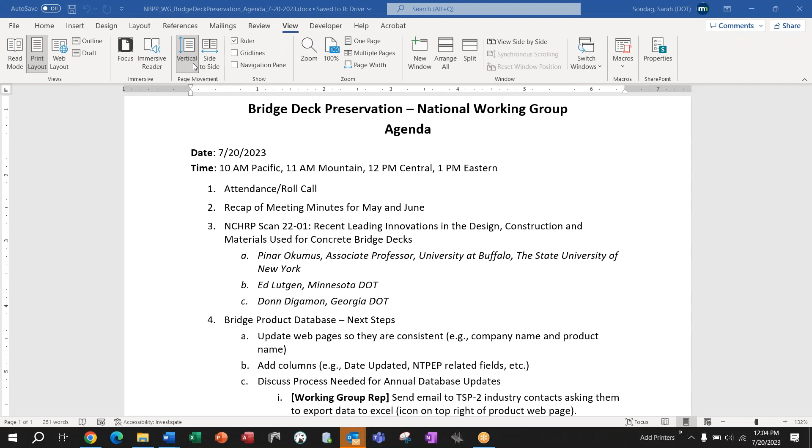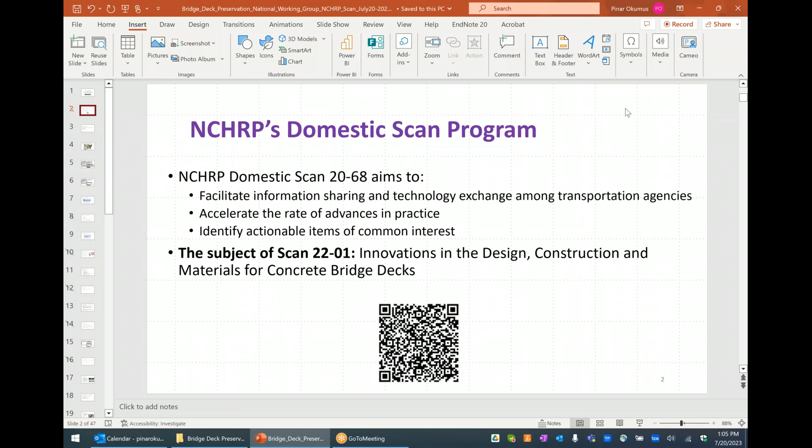Does it become public then? It doesn't have to be. I was just thinking that I know there's a few people that aren't able to get on the call today that might be interested in hearing it, so if that's okay with you. Yeah, that's totally okay, even if it's public, it's okay with me. I just don't know how NCHRP feels, and we won't share it unless we get the okay from you.

Okay, that's great. I'm new to GoToMeeting, so just bear with me. How do I hide this? Okay excellent. All right, so can everybody see my screen now?

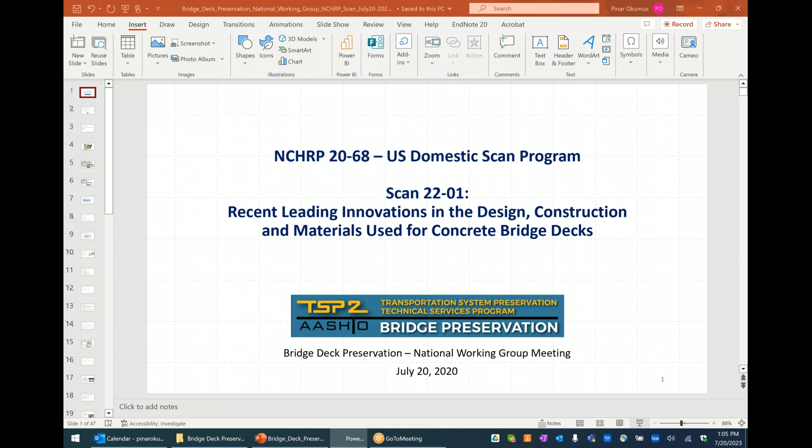Yes, we can. Excellent. All right, so like Sarah said, I'm Pinar Okumus from University at Buffalo, and Ed and Donn were supposed to join us, and we were all part of this domestic NCHRP domestic scan on innovations for concrete bridge decks. So I'm going to try to summarize what we discussed over a whole week-long workshop in about half hour.

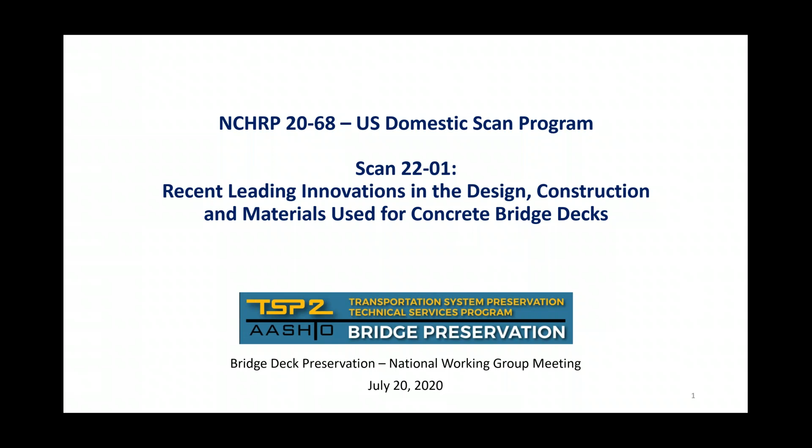Our motivation for the scan essentially was to talk about three different things: materials, construction practices, or design practices to improve deck durability. We did actually talk about other things like environmental sustainability or accelerated construction for decks, but it looked like for most participants of the scan, durability was the number one motivation to make decks better.

In case you're not familiar with the NCHRP scans, essentially we bring together transportation agencies so that there is information exchange between the agencies, so it's all different practices of different transportation agencies.

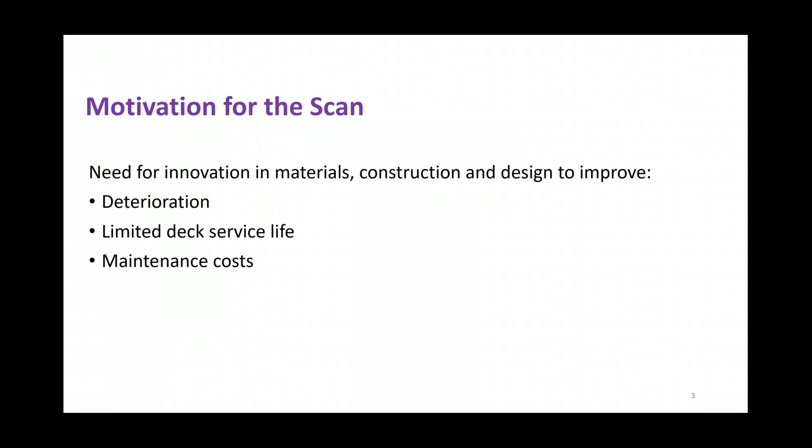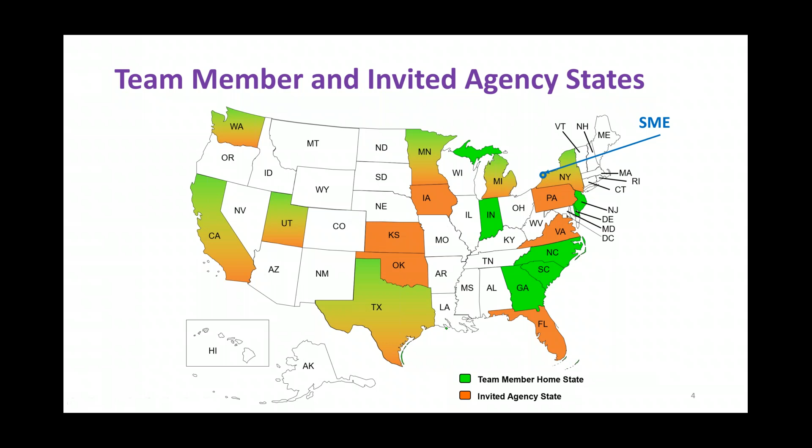The report should be available in a couple of months. I won't have time to go through every single one of them, but there's a ton more information in the upcoming reports. But I'll try to give you an overview of what we discussed and what we found out.

So I'll start with this first group: concrete mixes, placement, and protection. And that part really, so our scan was focused on innovation, but this particular part is really more going to be about best practices and modern concrete mixes. So not too much innovation there in terms of materials, but what worked the best for the agencies that participated in the scan.

Okay, so the first thing we really discussed was what makes a concrete mix crack less. And one thing that really came out was the paste content of the mix. So it looks like for these modern mixes that have less cracks, the paste content is limited. So if you limit the paste content, which would be water and cement content, it does seem to result in fewer cracks. And of course you also get a moderate strength, but the consensus was that we don't really need a terribly high amount of strength for concrete bridge decks anyways.

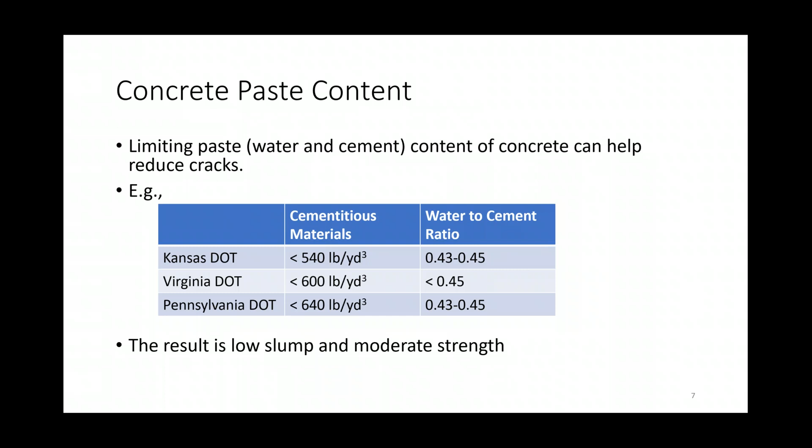The second thing to say about concrete mix is that limiting concrete shrinkage strains seems to have a big impact. That's a common performance requirement we saw when people had these high performance mixes. Some DOTs in the scan achieve it with shrinkage reducing admixtures. California is a big fan of this, and they reported really benefiting from shrinkage reducing admixtures without increasing the costs all that much.

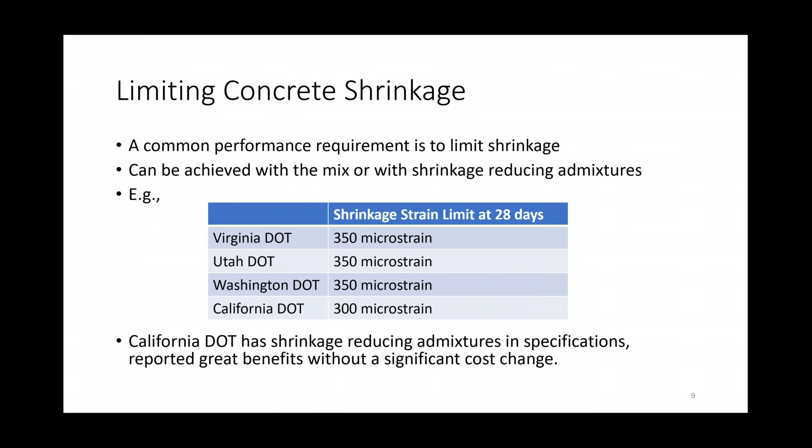In the report, there's going to be a case study from California DOT that details how they came out with that mix. We have 4 examples from participating states on their shrinkage strain limits, right around 300 to 350 microstrain, and how they achieve that is kind of up to them. For example, Virginia DOT uses shrinkage reducing admixtures, but it's optional. If they can achieve the shrinkage strain without the admixtures, they're okay with that.

We also talked about placement and finishing. Again, this is really not innovation, but most DOTs agreed that you get the best quality concrete when you minimize finishing, so that you can start external curing or wet curing right away.

We talked about bringing work bridges to site so that workers can start curing right away without having to wait for the deck to harden, avoiding that timing delay for the same reason - so you could start right away with external curing. Some DOTs mentioned monetary penalties per hour of delay in external curing to encourage contractors to start curing right away. That was a big thing, essentially, getting started with external curing right away.

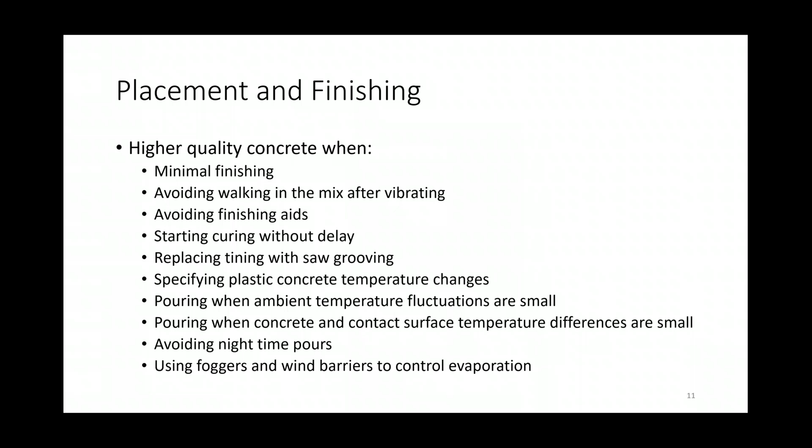Use misting even before that, if you can. There was also discussion about specifying temperature changes for plastic concrete, trying to pour when ambient temperature fluctuations were small, or at least when the concrete and the contact surface - the girder - temperatures were close. If the concrete and girder temperatures were very different at the time of the pour, it seemed to cause more trouble, and avoiding nighttime pours for that same reason. So controlling temperature as much as you can seems to result in better quality concrete.

We did talk about external curing, like I said - wet curing like we all do - the key is to start right away. But there's also this new innovative way of curing concrete called internal curing.

Essentially what it is: you replace a fraction of your aggregates with pre-wetted lightweight aggregates. That water in the aggregate is released over time to help hydration. So instead of just hydrating the surface of the concrete, you're essentially hydrating from inside out - internally.

This was very interesting, and we spent a lot of time on this during the workshop. For some states, this is pretty much standard practice - New York and Virginia were two of those states, and they do this for all their concrete decks and have seen great results. But other states have mixed results with this. We came to the conclusion that the states with good results must have good quality lightweight aggregates, and they're confident with the moisture content of the aggregates.

Suppliers know how to store them. Versus if you have mixed results, you probably either don't have lightweight aggregates at all, or you're not sure about the quality of it, or the contractors are inexperienced. Also, this is a method that requires a good amount of owner involvement to set it up right. So if there's insufficient owner oversight to get this method working, that seemed to be when there were mixed results.

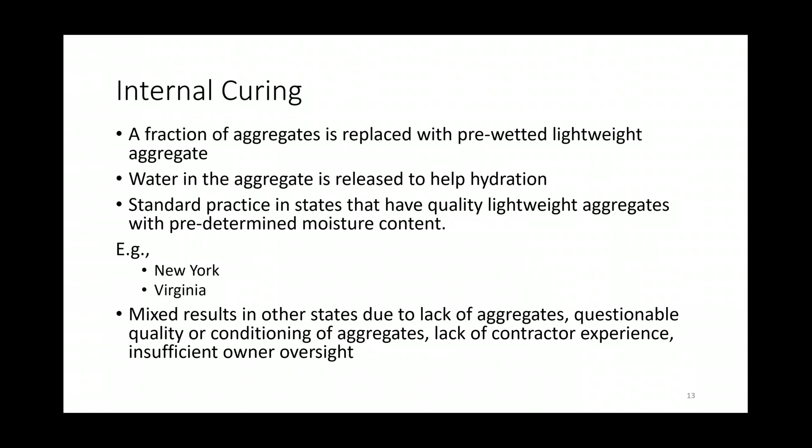I would say New York and Virginia are the two states that really have all internally cured concrete, and they do get great results. So that's what we talked about when it comes to concrete mixes. The next thing we talked about was adding fibers to concrete, so that's what I'll cover next.

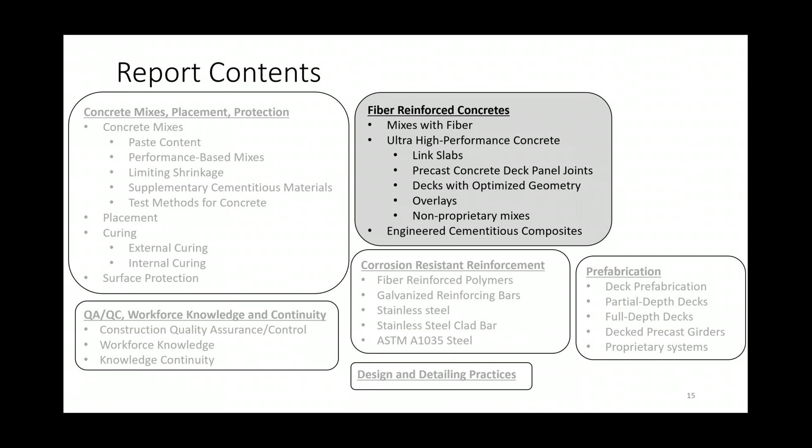All right, so mixes with fiber. Some agencies do this to have an additional measure, kind of insurance essentially, to protect against any issues with quality of the material they get, concrete mixed material, or the construction quality. Because construction quality is big to make concrete crack less. For example, maybe you have delays in external curing, or workers end up walking in concrete after finishing, after vibrating. So to protect against these unexpected or undesired events, it may be good to add fibers into the concrete.

California presented on this, and it is standard practice for them to have fibers in their mixes. Minnesota also has fibers in their deck mixes. But one important thing that got emphasized was that if you just add fiber in your mix and think that it's going to work, that's probably too naive of an approach. The type of fiber - there's various different types, suppliers, sizes, orientation, distribution - all these things impact results greatly.

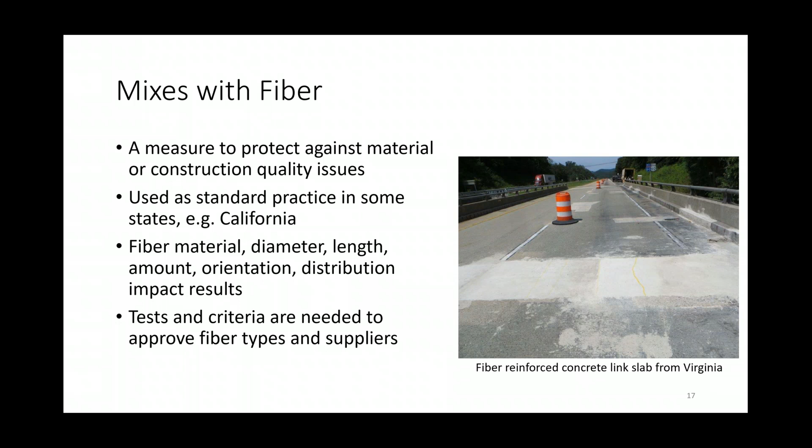Okay, so the next thing was ultra high performance concrete, UHPC. You've probably all heard about it because it's such a popular topic right now. It's essentially a type of fiber reinforced concrete. Usually the fibers are high strength steel fibers, and UHPC is essentially a fiber reinforced concrete with a specific performance objective - it has very high compressive strength, more than 22 KSI is possible, which is not so critical for decks to achieve, and it has low permeability, so very high packing density, low permeability, which makes it very durable and attractive for deck applications.

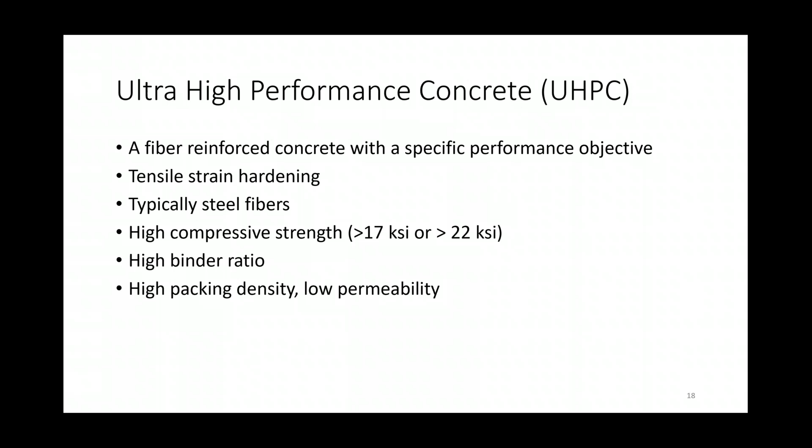So we discussed multiple different applications of UHPC. I'll give you some examples. One of them was link slabs. This is essentially that piece of the deck that goes over the supports or connects two girders, or between two girders. Link slabs are actually used with conventional concrete as well, but they tend to be much, much longer.

New York has started replacing some bridges, bridge decks with expansion joints, with these link slabs, and they reported that they've had great performance with these. When they switch to UHPC, they now can have a link slab that's much shorter, just a couple of feet, as you can see on the right-hand side. And the thickness is also smaller too. So that completely eliminates the expansion joints, and that's how they get durability. It's essentially acting like a hinge on top - that's why they debond between that UHPC layer and the girders. They've done several bridges with this, replaced them - this is mostly for replacement projects for them, but they still have many to come. So they're going to continue to build these.

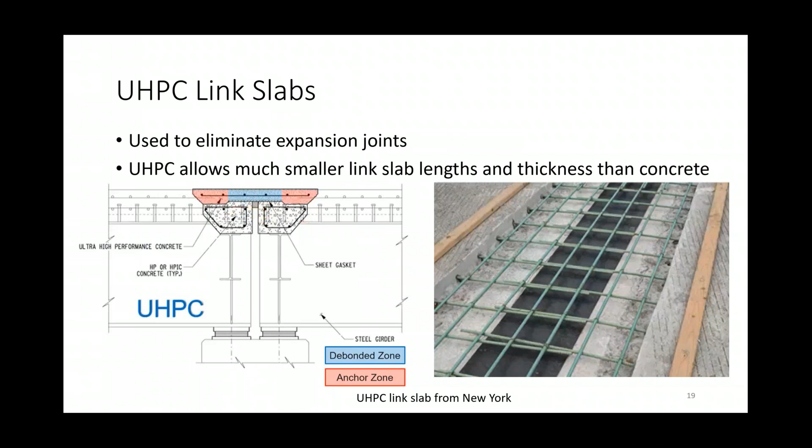Okay, the second example with UHPC applications is deck panel joints. These would be precast concrete deck panels. UHPC, as you know, is much more expensive than conventional concrete, so most of the applications you see would be small volume applications. This is an example of that - precast concrete panels, either between the two panels or between the panel and the girder, you can use UHPC. We heard during the workshop from Utah and New York, and they both reported that when they did use UHPC joints, they actually got pretty much equivalent performance to post-tensioning these deck-to-deck joints. So if post-tensioning is not a desirable construction method, UHPC seems to be a little bit easier.

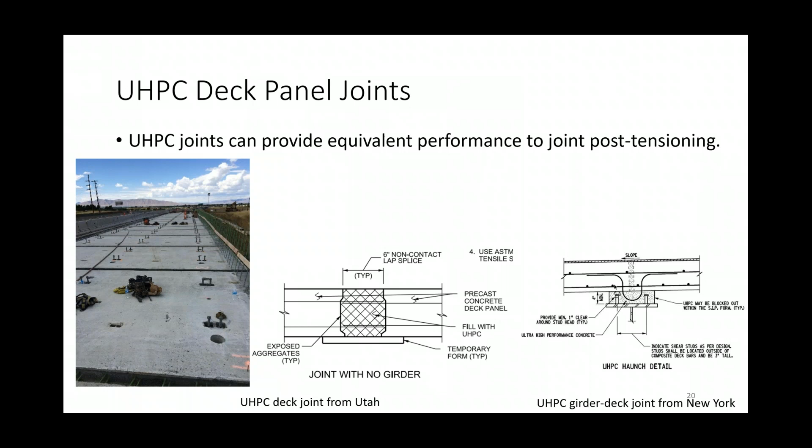All right, so here are some really key points in making UHPC work, and this is not just for these two applications, but for any application - I didn't cover it all with UHPC. One very important thing is to really seal the forms against leakage, because UHPC is a lot more flowable than normal concrete. That's why you see on the right hand side that there's actually a top cover as well for that form. So you do have to seal them, and it's a material that tends to settle a little bit.

So when it hardens, you actually essentially fill the joints a little bit more than you need to, accounting for that settlement. That's why there's that bucket here - it's essentially maintaining hydraulic pressure over that joint. And if you do have a little bit extra, that can get grinded off later.

The other key thing is that if you're pouring UHPC at point A and expect it to go to point B, and those two points are very far from each other, UHPC is just going to flow a very far distance. What can happen, what people reported happening, is the fibers essentially all orienting in the direction of the flow, which is very undesirable. So we do want a random distribution of fibers. Keeping those flow lengths short is recommended.

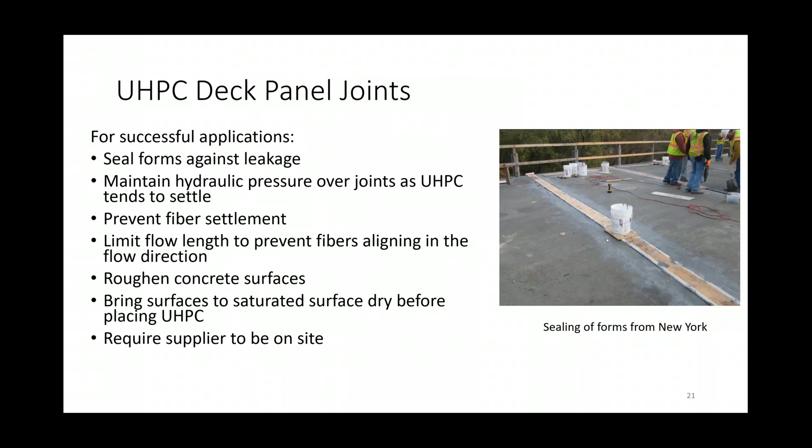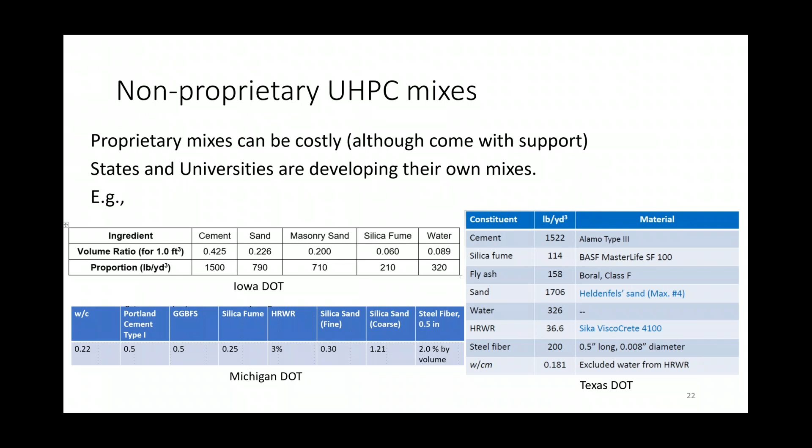All right, finally on this topic - UHPC, the proprietary mixes can be very costly, although there are now multiple vendors and suppliers of UHPC, and the cost is expected to go down. Many states and universities are now developing their own non-proprietary mixes. I give three examples here from Iowa, Michigan, and Texas, because they participated in the workshop, in the scan, but really there's many others across the country. So everyone is now coming out with their fiber reinforced, low permeability UHPC mixes.

All right, so next I'll move on to corrosion resistant reinforcement.

I don't know if it's better to take questions at the end, probably for time reasons, but if there's any burning questions, please feel free to unmute. Yeah, either way will work. We have plenty of time, so if you need more than 30 minutes, please, you're fine. Okay, that's great, thank you. I thought I saw that in the chat. Great, okay, would anyone like to? And I saw Ed sign in, and if Ed, you want to add anything at any point, feel free to.

Okay, all right, so we did talk quite a bit about corrosion resistant reinforcement as well. Although one theme that came out of the workshop was that if you can control cracking with the concrete mix itself - if you can come up with a modern mix, a low shrinkage, low paste content, high cost construction quality mix - then that's really the best option, so that should be prioritized. Corrosion resistant reinforcement really kind of should come next, maybe it comes after, it's used for bridges that are just very remote and very hard to maintain, or hard to access.

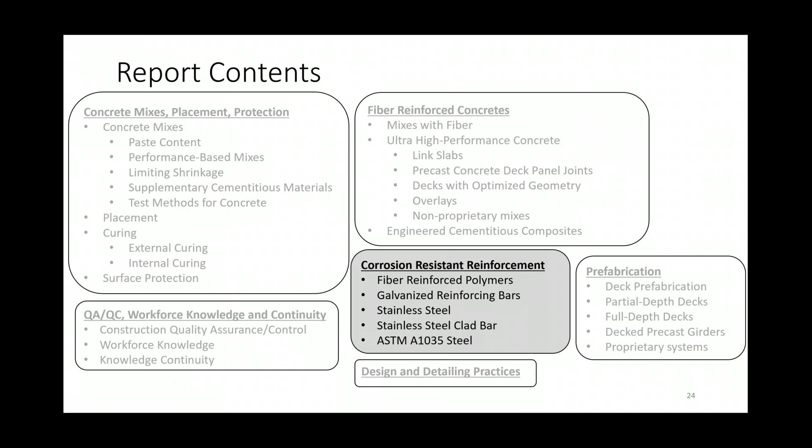Okay, so I'll start with fiber reinforced polymer, or fiber reinforced plastic, FRP rebar. There's different kinds of FRP rebar - glass FRP, carbon, aramid - but glass tends to be the most common, is cheaper. So most of our discussion focused on glass FRP rebar.

For this one, we heard from Florida DOT that has used FRP rebar actually since the 80s. They have a great website dedicated to their FRP research. They have essentially developed concrete applications with FRP rebar, although most of their applications are for substructure units, because in Florida, the corrosion starts from the salt water, not from de-icing salt. So you see a lot of piles and substructure units, essentially.

The differences between FRP rebar and metallic reinforcement is that it doesn't corrode, it's not metallic, so that's great. It's very lightweight, so it's very easy for construction workers to pick them up and move. So it does facilitate construction, actually.

But there was some discussion about how the FRP grid can actually float during the concrete pour if you don't secure it well in its place. So you can technically get smaller covers, like smaller top covers, deck covers, reinforcement covers, because it doesn't corrode, right? We don't need that large cover. But just because some DOTs were worried about the floating issue, they still went with a larger cover.

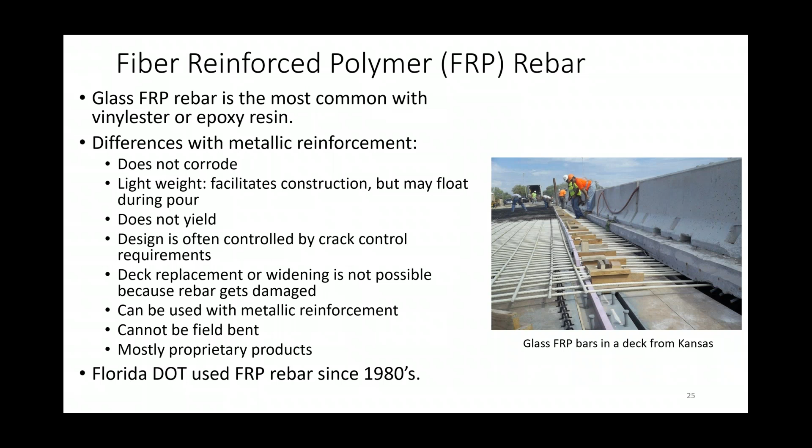Okay, then we talked about galvanized rebar. We're all familiar with it. I think the hot dip version of it, or batch galvanizing. So ASTM A767 bars have been around for a long time.

A newer product is continuous galvanizing. So it's essentially, there's a difference in how they galvanize it, and there's one supplier of that in the US, and they do claim that it makes the operation a little bit more efficient. So you can essentially, the bars get bent and galvanized at the same facility. So if you're close to this facility, it may be a good option to go for.

They do not have that issue that epoxy coated rebar has with bonding to concrete. So it's essentially similar bond to concrete as you would have with your black bars.

And on this topic, we heard from University of Kansas again. Dr. Darwin came, and their results show that both hot dip and continuous galvanizing essentially had similar performance. They had some lab testing and field observations to show that. And they did run some service life analyses.

So they reported that the rebar has a slightly higher initial cost, but you can get about half the service life cost as compared to uncoated rebar.

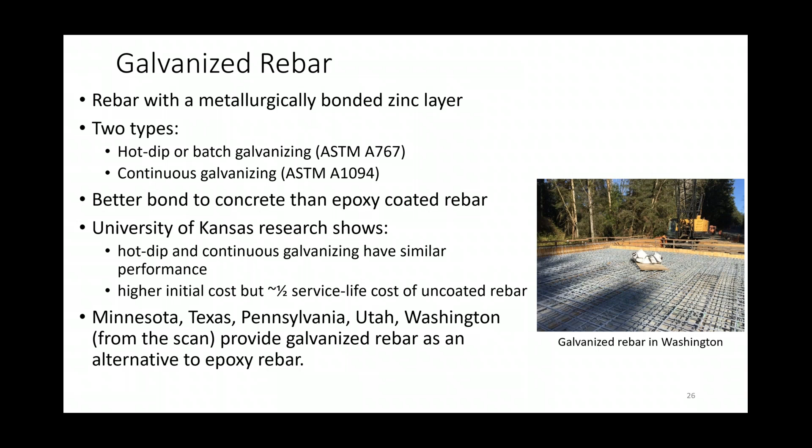Okay, we did talk about stainless steel rebar. So stainless steel rebar, when it came to that, the conclusion was that it's an alloy, right? So not all stainless steel is the same. So really the performance will depend on the type of the stainless steel rebar.

One interesting thing that we learned from Virginia DOT is on the right-hand side. They do have these X-ray fluorescence handheld devices, and it can actually tell you the composition of that alloy. So they were using it to verify essentially what you specified was the same as what they received from the manufacturer. So that, I think, is the quick way to check the alloy, and of course, specifying the type of the stainless steel on the specifications is important.

We heard from Virginia and Michigan about the cost of stainless steel. Virginia reported a 5% additional total cost if they use stainless steel in the deck, and their justification is that the cost may be smaller than a future overlay, which makes sense. Michigan DOT reported about $17 a square foot of additional cost, and that's, again, 2011.

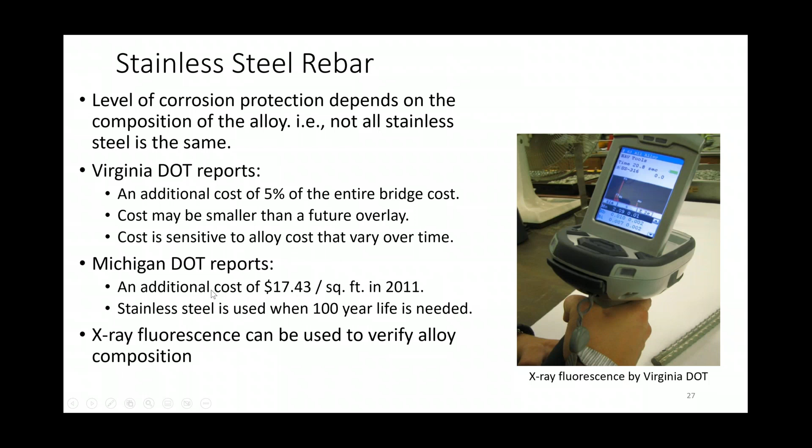ASTM A1035 bars are another alternative. You may have heard these with their brand names, MMFX or ChromX. These are chromium alloy steels, and there are 3 different types: CS, CM, and CL. CS provides the highest corrosion resistance, and of course, it has the highest price.

They come with either 100 KSI or 120 KSI yield strengths, but most agencies that participated in the scan reported that they choose not to rely on that high strength. They just use it as a one-to-one replacement of good old grade 60 steel, or cap the yield strength in the design to be conservative. There isn't all that much data available for the long-term performance of these bars.

Most states use the CS type because that's supposed to provide the most corrosion resistance. Minnesota reported some quality control issues with the CM type, so the manufacturer is aware and working on that.

The cost is a little bit higher. I put the Michigan DOT numbers here, so $2 to $3 a pound versus $1.5 to $2 a pound for epoxy coated bars.

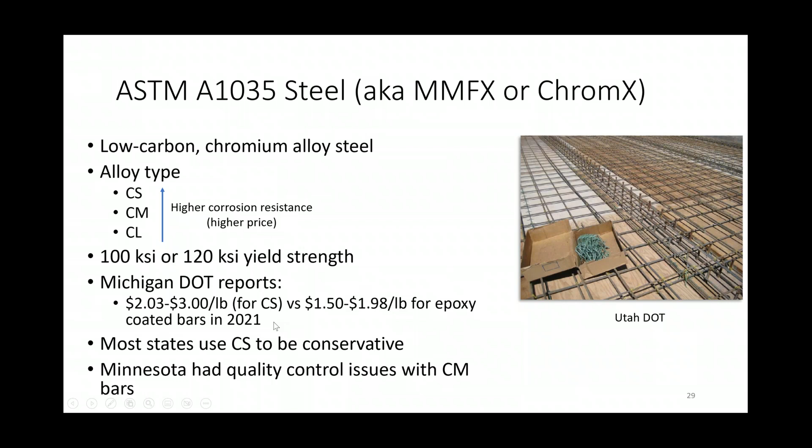The next step is prefabrication of decks, and that's for both accelerated construction and also durability, because you're getting prefabricated units that are steam cured, built in a higher quality environment. I won't go into every one of these categories, but like I said, the report has a lot more.

I think I picked 2 here. One is the partial depth precast deck panels. These are essentially like stay-in-place forms that may be pre-tensioned, about half the deck thickness, and they provide a safe walking surface and formwork, essentially.

We heard quite a bit from Texas DOT, because apparently more than 90% of their bridge decks are built this way. This is essentially standard practice to use stay-in-place or partial depth precast deck panels for their deck construction.

We do know from the other states who participated in the scan that not everybody has a great experience with this. Some other states, for example, have reflective cracking when they use these panels. But Texas told us about their keys to success. Two important things we noted: one, they have these bedding strips.

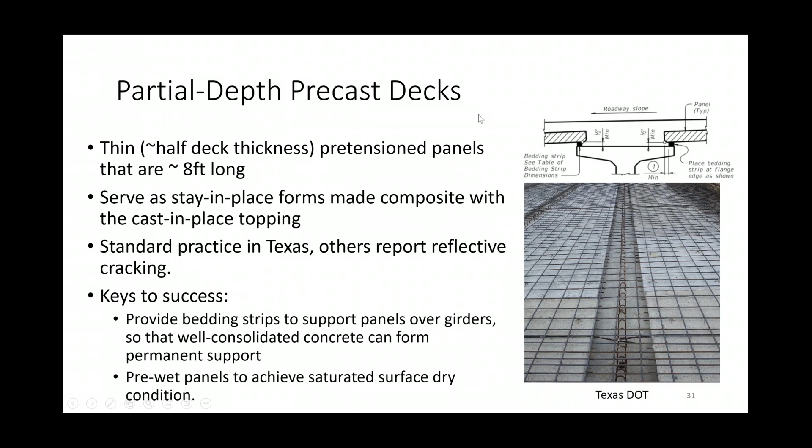We also talked about full depth precast deck panels. We touched on it a little when I talked about UHPC, but they're great for rapid construction, or if you're far from an area with concrete suppliers.

We heard from Utah DOT and New York DOT, who use these full depth deck panels and are happy with them. We also heard from California DOT, where the bridge was fine but it was quite costly when they tried it, because they used it on a bridge with complex geometry. It had a curve, so it's likely a costly alternative if you have complex geometry, but if you don't, then it seems to be a pretty good alternative.

For this, again, joint details and materials are critical. Utah told us that either they post-tension the decks together or they use UHPC, and those are equivalent to each other, so either of those joints perform well. In the past, they had much wider joints with normal concrete, and those had cracking between the panels, so the joints didn't perform very well.

Because UHPC bonds so much better to reinforcing bars, your development lengths are much shorter, so you can go with much smaller joint sizes with UHPC, as you can see on the left-hand side. And on the right-hand side, again, is that hidden joint detail from New York.

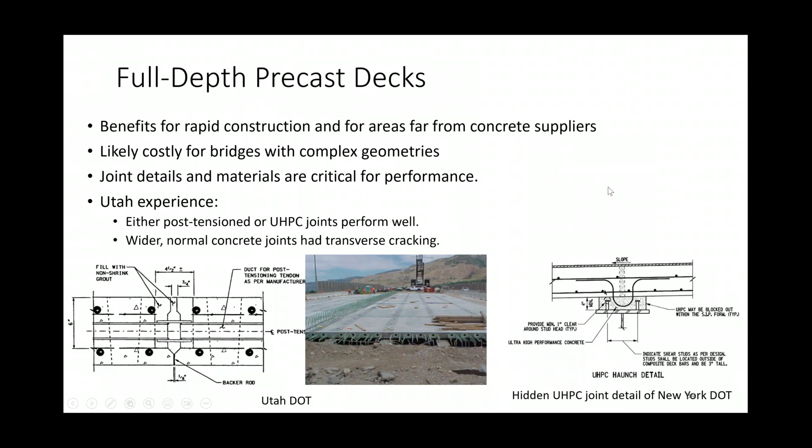We did talk about decked girders. So some states develop standard plans for these deck girders. These are essentially girders that come with either a partial or a full prefabricated deck, integral.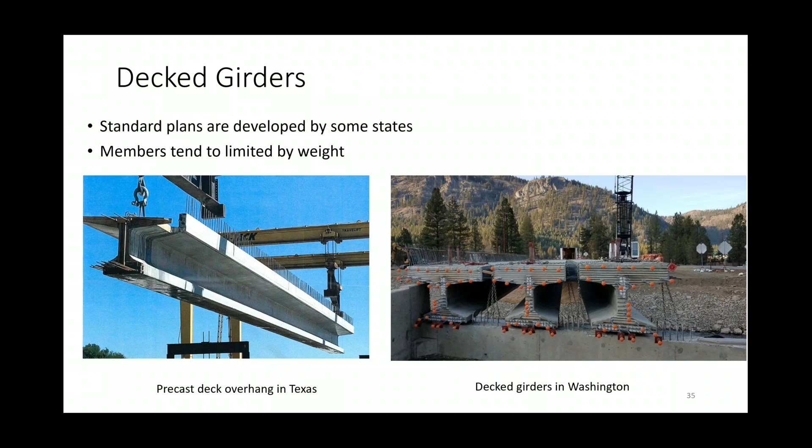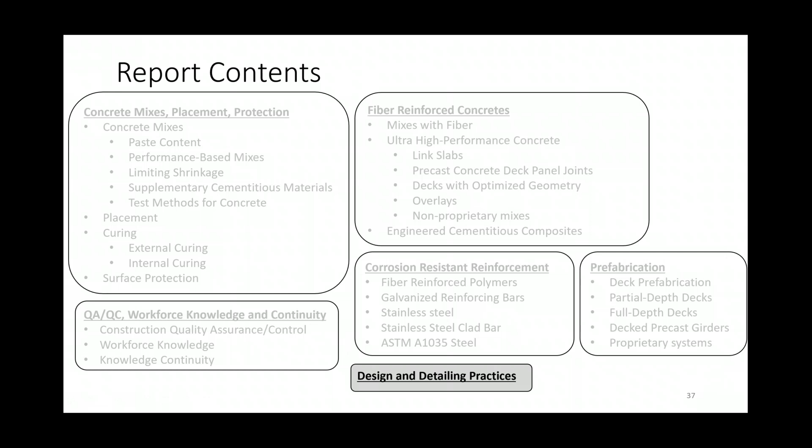All right, so coming towards the end, we talked about design, how design and detailing practices may improve deck performance. I'll give you a couple of examples here again on that.

One thing we realized is that there's quite a bit of variation in design and detailing practices among states, and even within a certain state these practices vary over time. So because these things change over time and from state to state, it's really critical to document the implications of these changes.

So it's great to keep track of innovations. If you're changing something in design, was that successful? Did it do a good job? Both short term, but also hopefully long term.

So some examples of these varying practices. Some people use, of course, the empirical deck design method, some others use the traditional. One example here is the Minnesota deck.

They actually intentionally create a little saw cut over the supports to force the crack to occur there. That way you restrain cracking to that region and don't have to worry about cracking all over the deck. And the Texas DOT also mentioned they do something similar to this.

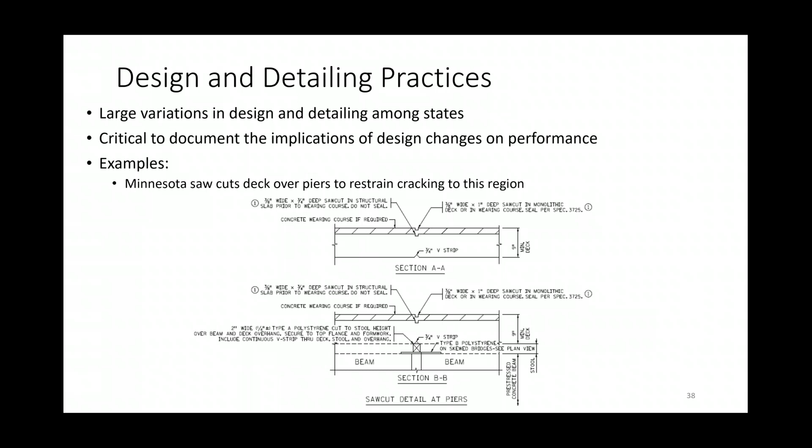All right, and then next up, Texas DOT again discussed how they reduced the amount of reinforcement in the deck as a method to reduce cracking. That may sound counterintuitive, but their reasoning is that if you have a smaller reinforcement amount...

the corrosion products that build over time are going to be small, and that's going to create less pressure when they expand, resulting in less cracking. So they switched the empirical method, AASHTO's empirical method, to get a smaller reinforcement amount as compared to the traditional method. The other change they made is that...

the very top layer of rebar, as you see in this cross section, is the longitudinal rebar. They place the longitudinal rebar closest to the top surface, and the reason for that is because their prevalent cracking was in the transverse direction, so the longitudinal bars restrain those cracks better.

This did help them reduce overall cracking, even though they got much smaller transverse cracks, but more longitudinal cracks. Overall they did see reduced cracking, so it seems like they're happy with these changes.

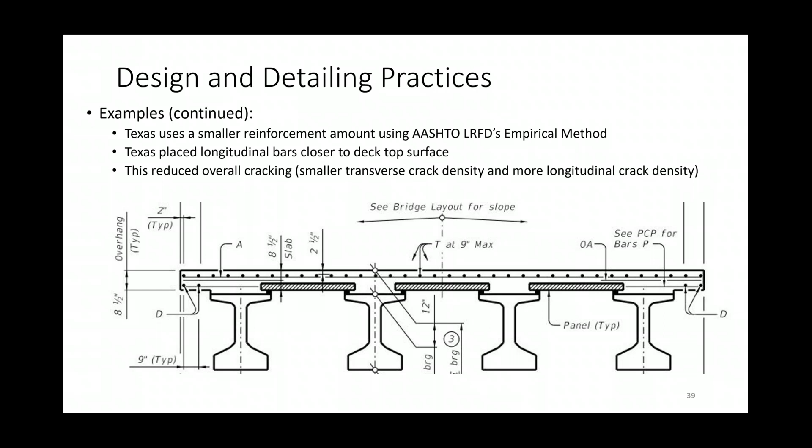Okay, and the last part. So quickly, we also talked about quality control, quality assurance, and different practices for making sure the workforce knowledge is there, and continues to be there.

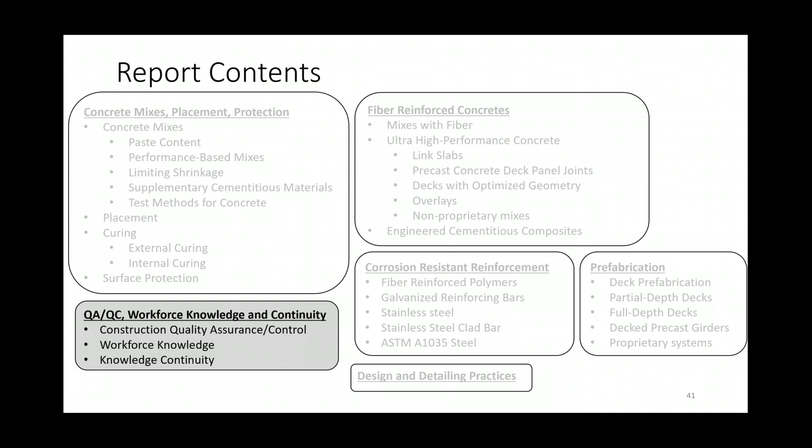In terms of construction quality practices, I think everybody agreed that especially if you're using an innovative product, something new, you have to be really well prepared for it. Some examples are here.

For example, people use these test pours, on the right-hand side I give an example from Washington. This is a test pour of a new mix. It could be on-site or off-site, but if the contractor does a test pour, they know what to expect with the rheology and workability of that mix.

Pre-deck pour meetings, construction checklists. On the left-hand side, I have the example checklist from Minnesota for a pre-pour planning the placement checklist. There's other ones too, and of course, training people.

We talked quite a bit about that during the workshop. Some DOTs, like Texas and Minnesota, provide training programs both for internal and external staff, inspectors, and they have certification programs as well.

And then also frequently sampling concrete by certified inspectors, and if you're using alternative bars, frequent sampling of that is important. We talked about how there have been some quality issues with even rebar, especially the ones that are more alloys rather than pure material.

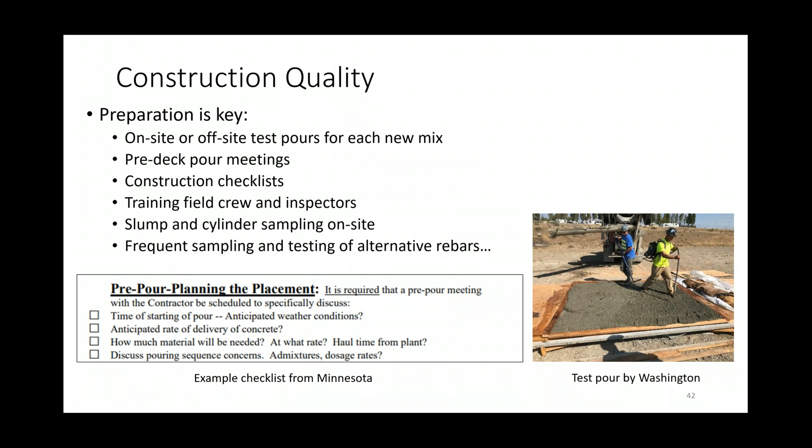In terms of knowledge continuity, we didn't put it all here, but we did talk about training quite a bit. What do you do when you have the knowledge now, but with the workforce changing and people retiring, how do you make sure that knowledge stays in the agency? One thing we know is that innovations don't just happen over time, they require iterations. So if there was a champion of that innovation in the agency, and they disappear, it shouldn't end there. One thing we discussed was making sure to keep good track of these innovative projects, how they're doing now, but also over the long term, so that it impacts decisions in the future.

Utah, for example, has an innovation-specific database or inventory for their bridges, with detailed information about performance, construction, and new things they try. Florida maintains great websites with all the research information - research reports, demonstration projects, applications, specifications - all in one place for things like FRP or other new materials they're trying. Minnesota has agency-defined elements for inspection, specifically for any innovative components for their bridges. All these things help keep track of how these innovations are performing.